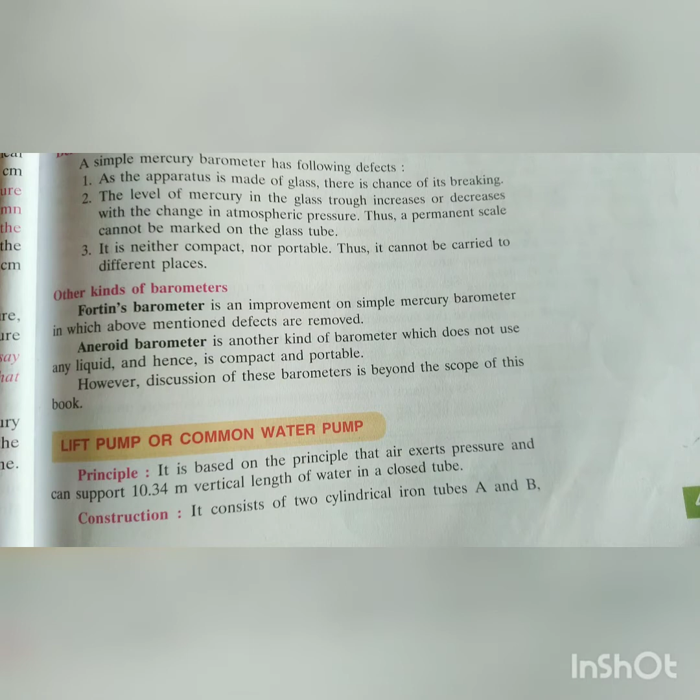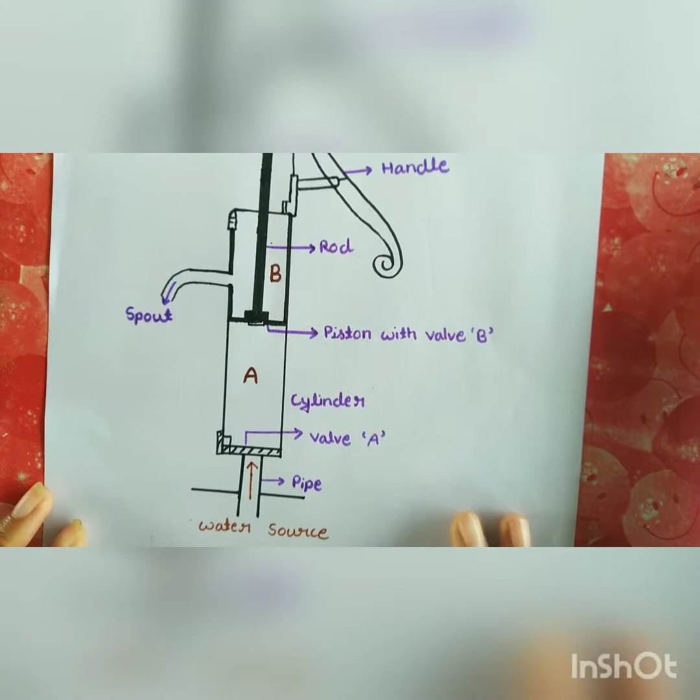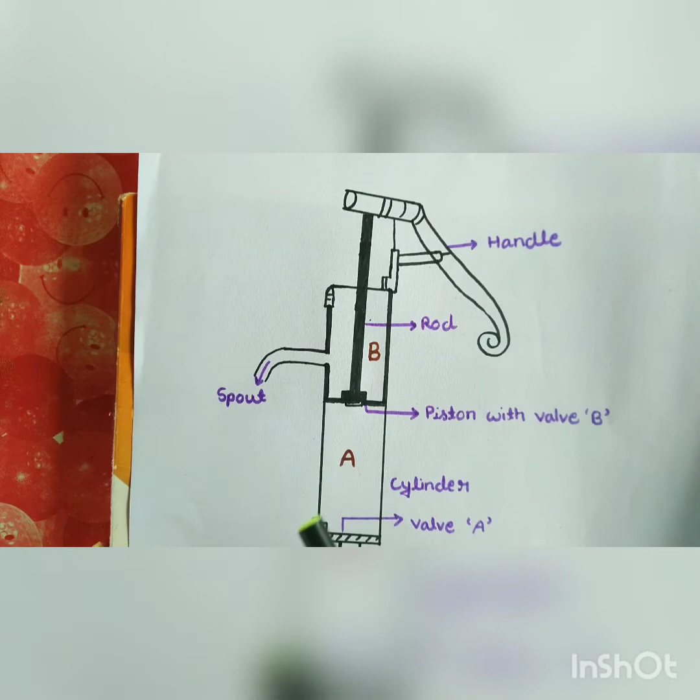Now today we are going to discuss the lift pump or common water pump. Dear children, here is the water pump figure. This figure is known as a water pump. Here is the water pump principle: a device to pull water from a well and to pull water from underground. Its working principle is based on atmospheric pressure.

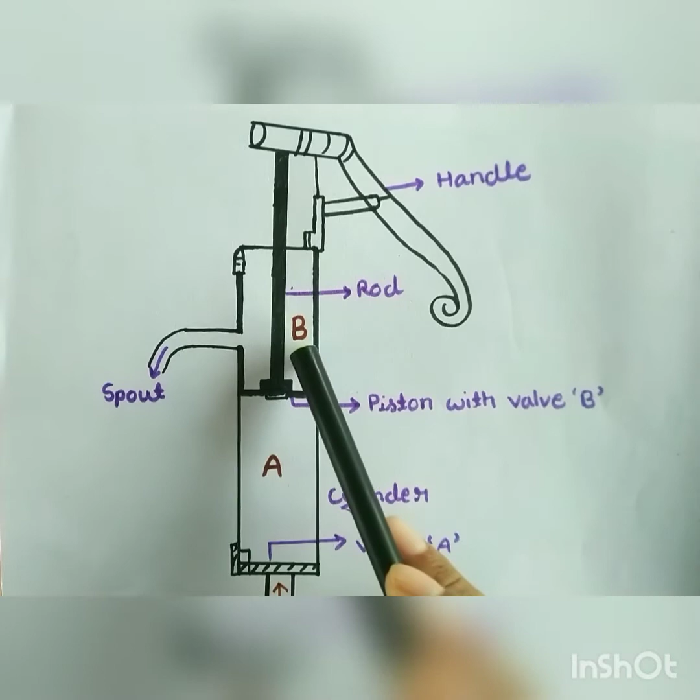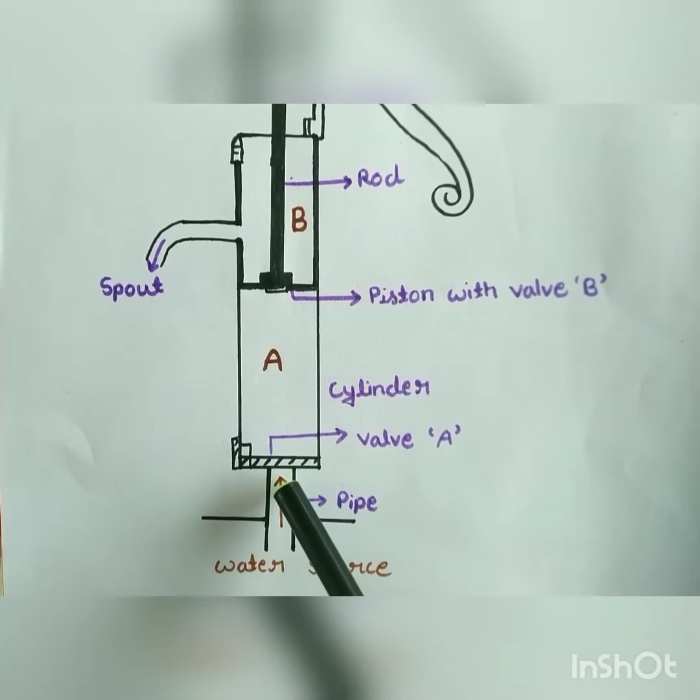Let's see the construction. The device is made up of a cylinder and piston. In the cylinder, the piston is fitted, which is joined with the rod. It contains valve B. The piston divides the cylinder into part A and part B. Here, part A is connected with the pipe which joins with the water source. There is valve A at the joint of the cylinder and pipe.

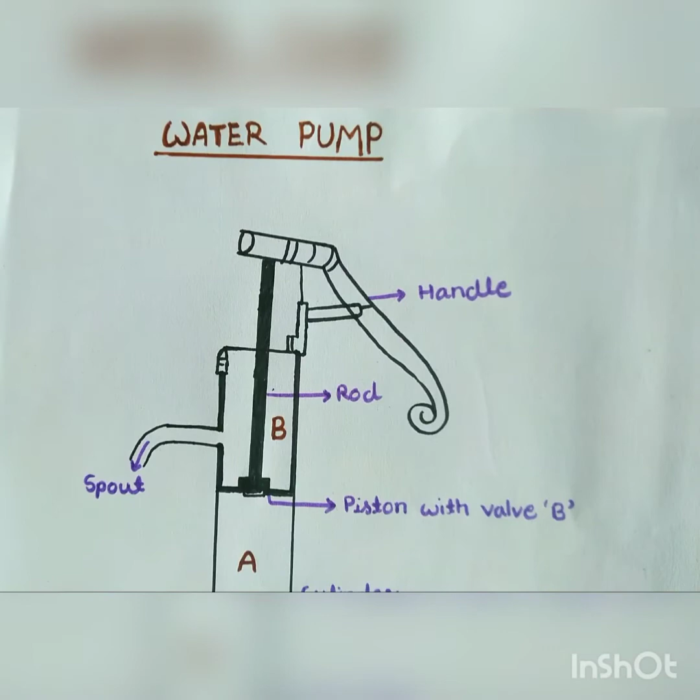Now let's start the working method of the water pump. The working method is based on pulling the piston and pushing the piston. A water pump is a device to pull water from the well or to pull water from underground. It works on the principle of atmospheric pressure. The device is made up of only two parts, piston and cylinder.

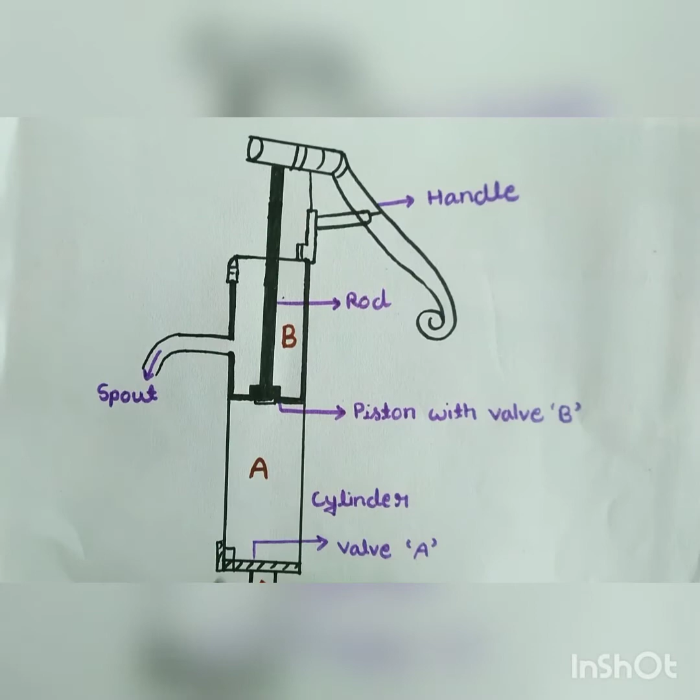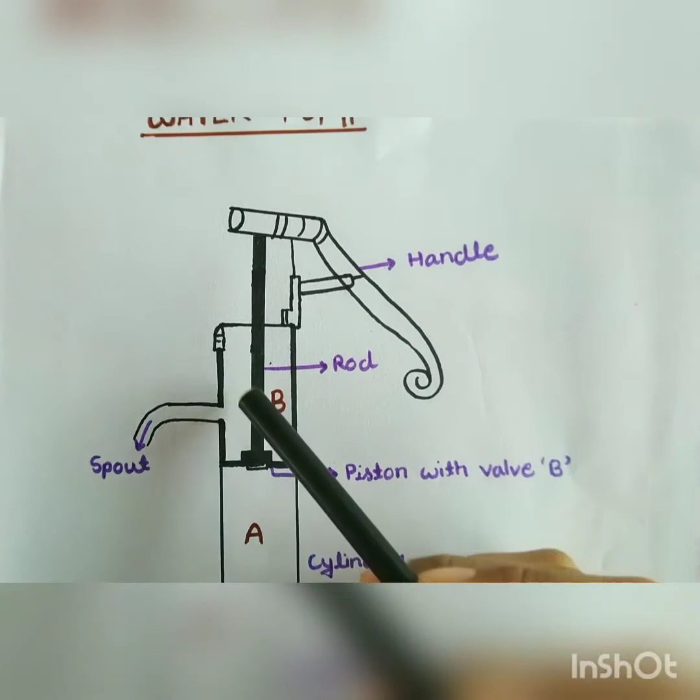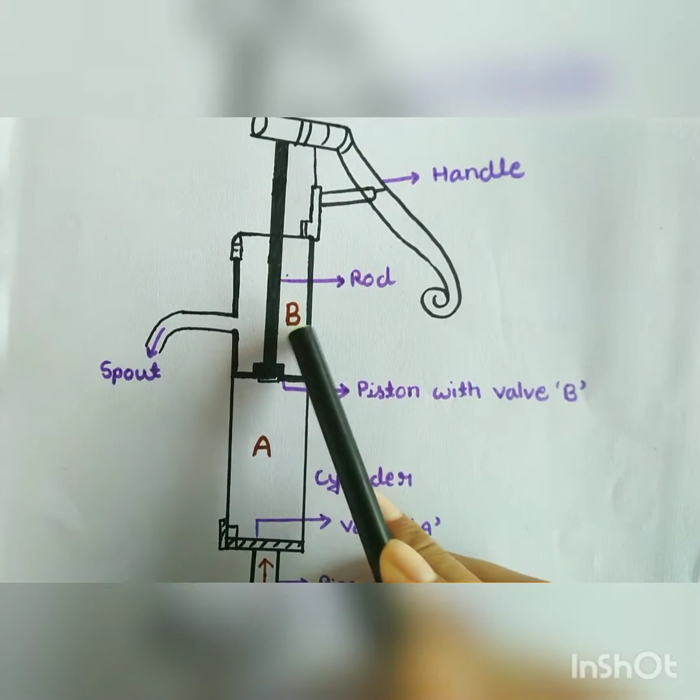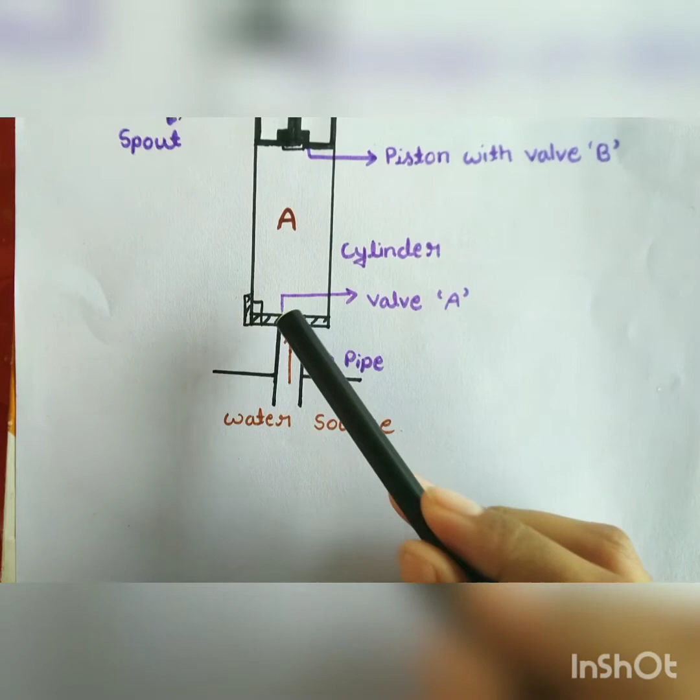Here, the piston is fitted to the rod with a handle on the top, and the piston has valve B in it. The piston divides the cylinder into part A and part B. Part A is connected with the pipe, and this pipe draws water from the source. Water flows into the cylinder through this pipe, opening valve A at the end of part A. So, this is the construction of the device.

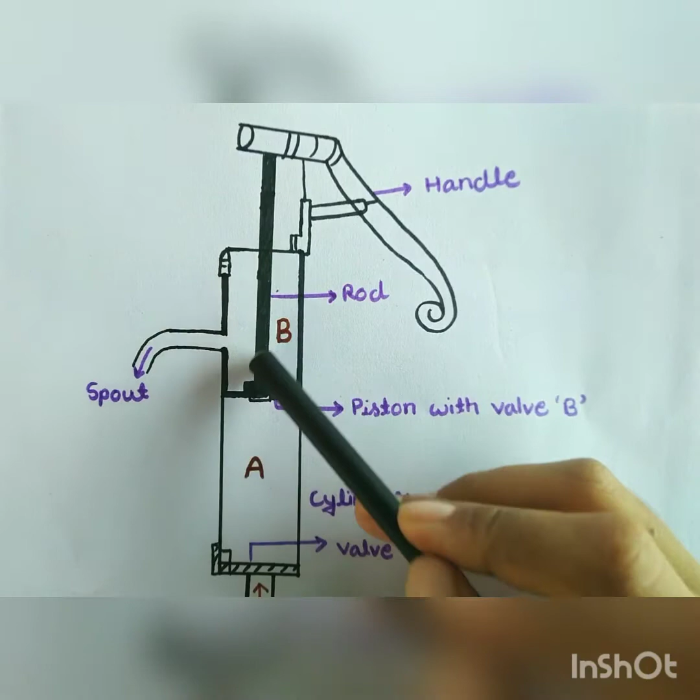Now, the working method is based on the up stroke and down stroke of the piston. In the down stroke, when the handle is lifted up, the piston is pushed down. When the piston is pushed down, the volume of A decreases and pressure increases in it. Due to the higher pressure in it, valve B opens and valve A closes. That is, valve B opens and water flows from A to B, from a higher pressure area to a lower pressure area.

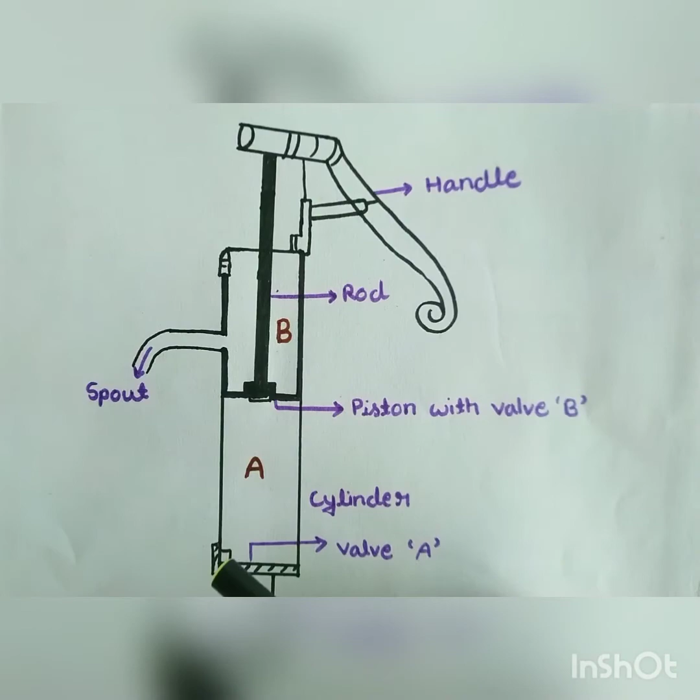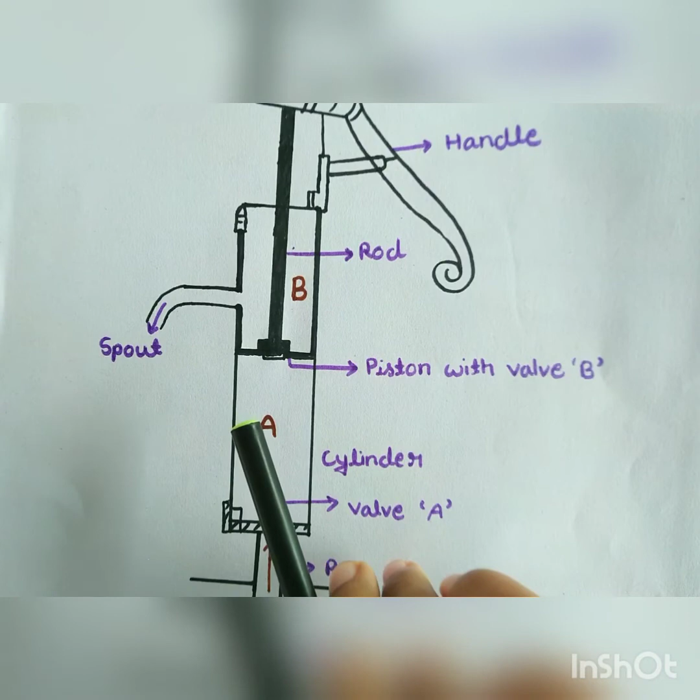Now, the next step, the up stroke, when the handle is pushed down, the piston moves up. When the piston moves up, the volume of A increases, which decreases the pressure in it. This decreased pressure opens valve A, because there is low pressure inside compared to the higher pressure outside in the water source. So the water flows from the higher pressure area to the lower pressure area through valve A.

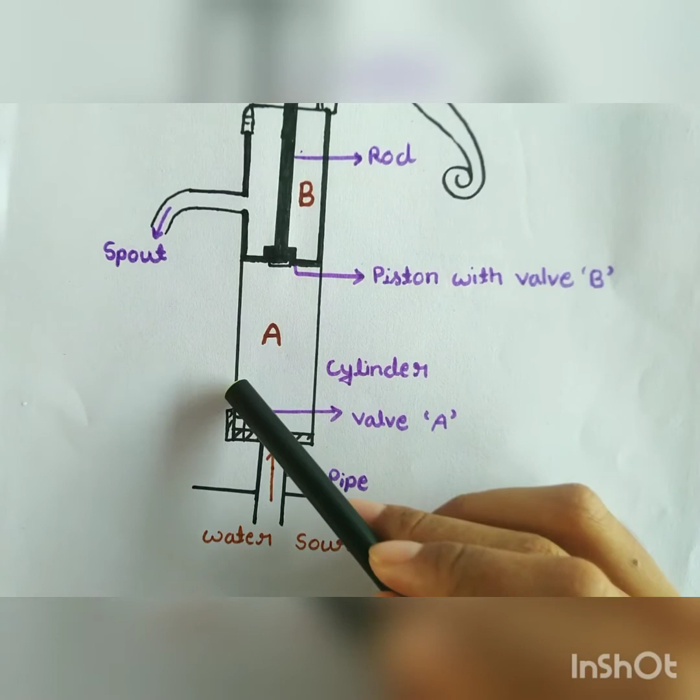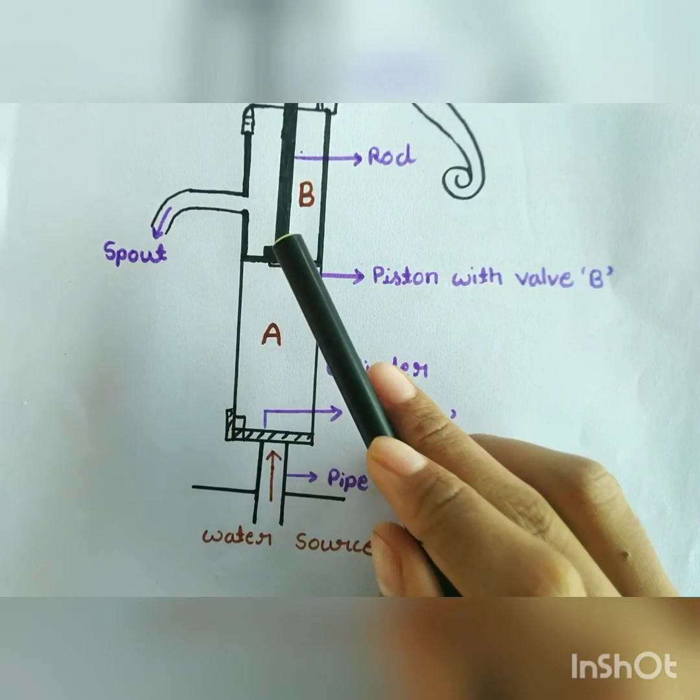Valve A is open now, so at this time valve B is closed because there is higher pressure in B, and due to the high pressure in B, water flows out from the spout. So this is the working method of the water pump.